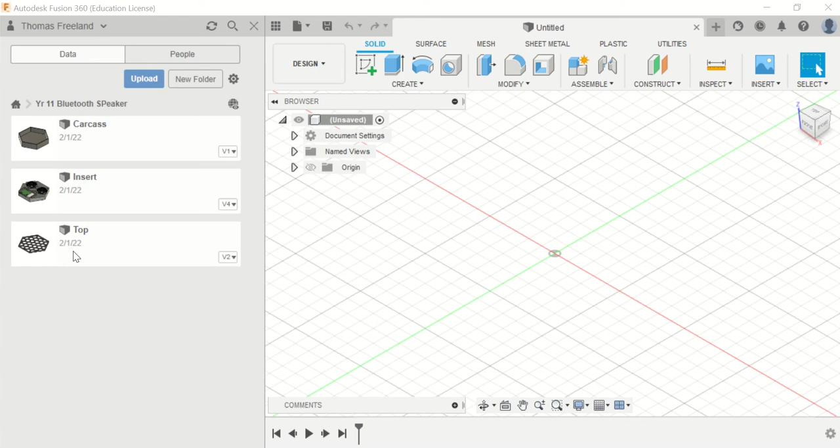Hi, so in this video we're going to place in the holes for the jack and the switch in the carcass. So I'm just going to open that. Then we're also going to put the job together and do a little bit of rendering.

First things first, we need to figure out how high up these two aspects are. I'm going to open the insert in a separate tab. This is the switch and this is going to be where the micro USB comes in. So what we're going to do is just measure those.

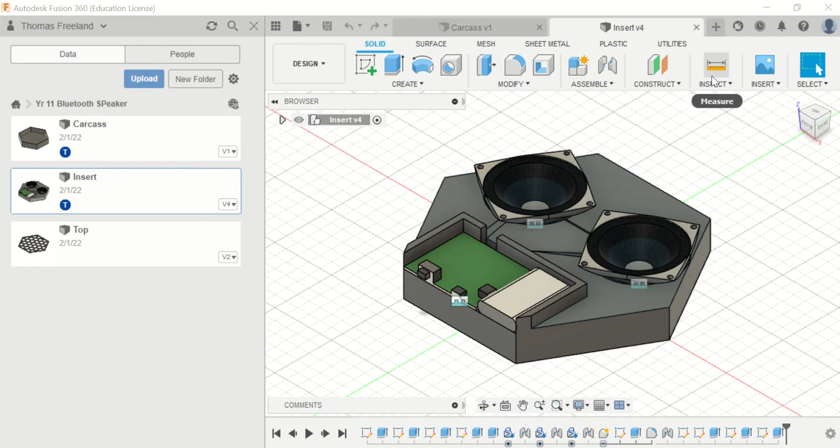I'm going to go to front view, angle it off a little bit, and use inspect from there to there. So that's 28.28, okay, from the ground to there.

Go to my carcass and figure out the depth again. So that's 35, let's write that down - 35, and the other one is 28.3. For the switch, let's see how the depth is - okay, 40. So that means the depth of my job is 5 mils.

So I'm going to add 5 mils onto that 28.3, and that'll give me where the switch will go. The next thing we need to do is figure out how far that switch is in from the edge.

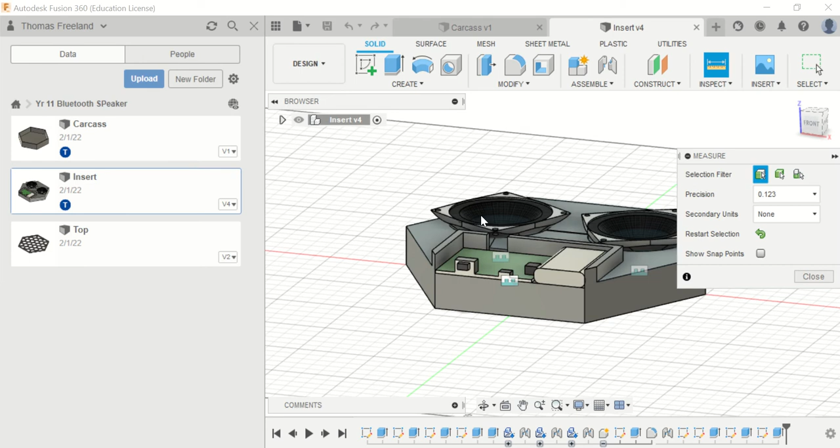So this will be one of the edges, from there to there - 16.753 on the inside. So what I'm going to do, because it's internal, I'm going to go like this.

Rotate it up. Got my line, I'm going to do a construction line. Got the corner. Actually, I'll get rid of that 5 mils as I'm doing it on the inside, so I don't need that anymore. So it actually is going to be up

28.3, and go to the side from here, which will be - just going to double check it - 16.7, 7.7, good. And then I just need to figure out how far that is across and down.

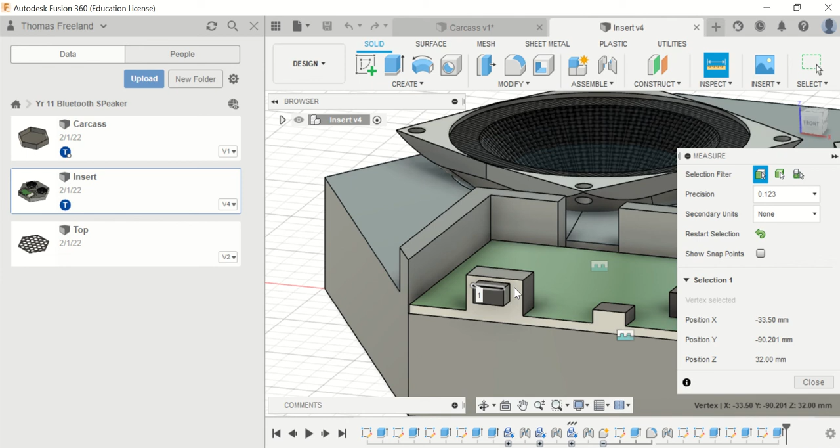So that's 7 mils, 4 mils, so now I'm going to create a square here, 7 by 4. We can turn those construction lines off. 7 mils, that's 4. We might add a mil on just to give a bit of wiggle room.

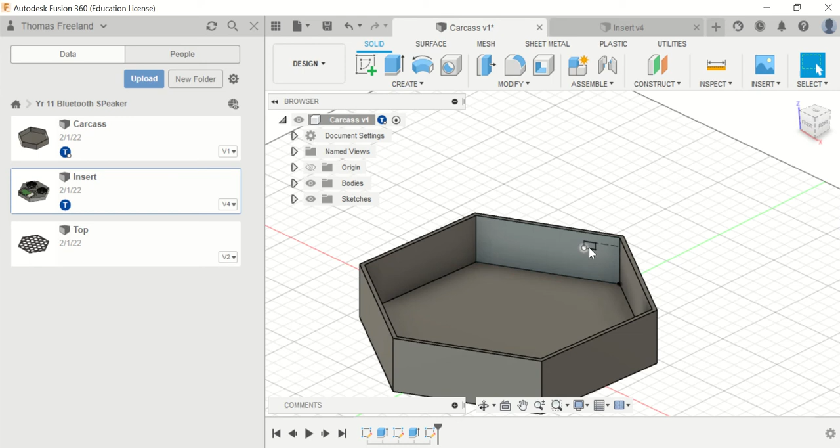8. Right. Close that sketch and then extrude that out with E. Just going to draw that tab like so.

What I'll do next is the micro USB - how far is that from there to there? So 25, write that down, so 25 on the internal.

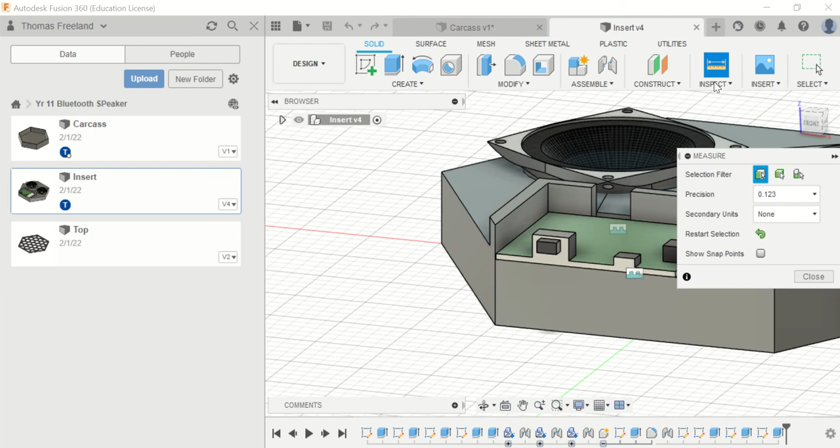And now let's find out how far this one is from the side. Okay, so that's 42.2. And then let's figure out the dimensions of this one too.

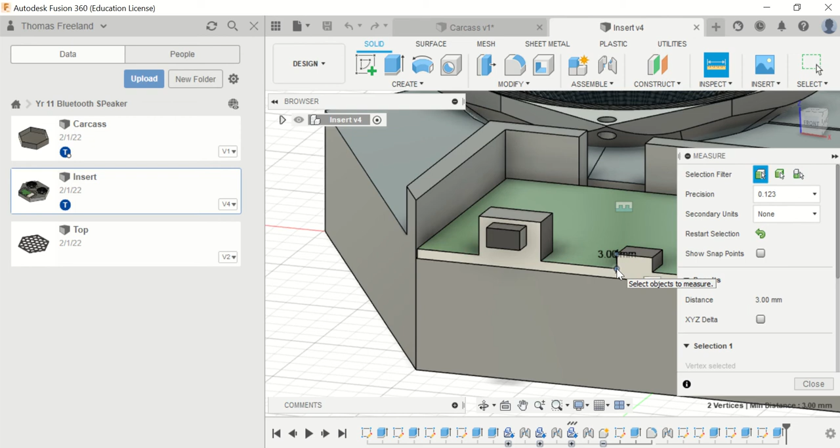7.5 by 3. So let's add another mil onto those, or a couple mils. So let's make it 8.5 by 4. That allows for a bit of wiggle room. So let's bring it in from the side here.

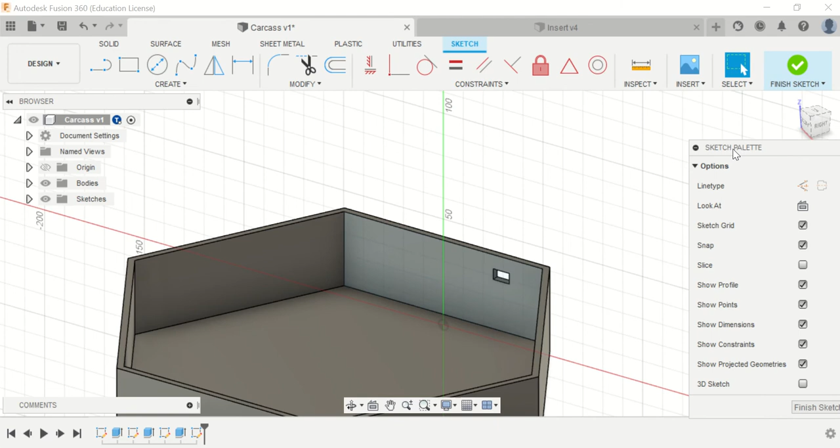Put this palette over here, give ourselves a little bit more room. Turn our construction line on. Got this corner in here. We're coming in 42.2.

Going to come up 25 mils. 25. We've got a square, which is going to be 8.5 wide as we've added on a little bit more, and then it's going to be 5, like so.

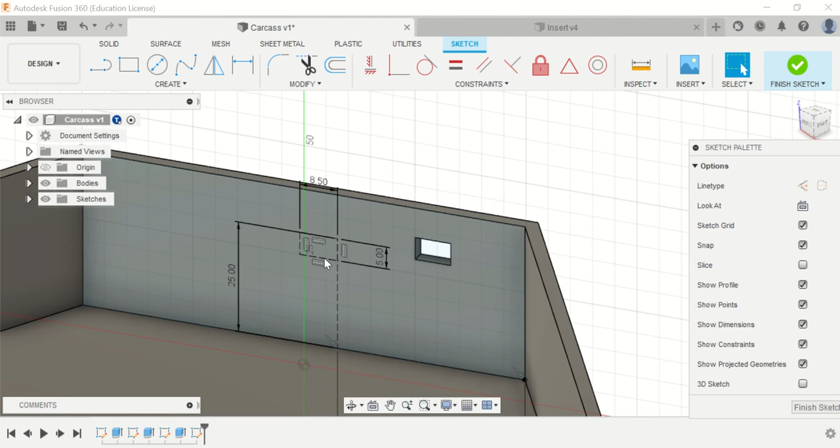Let's click on each of the lines, as we didn't turn the construction lines off, but that's okay. Construction lines - turn them off. Extrude, take it out. There we go. And we'll save it.

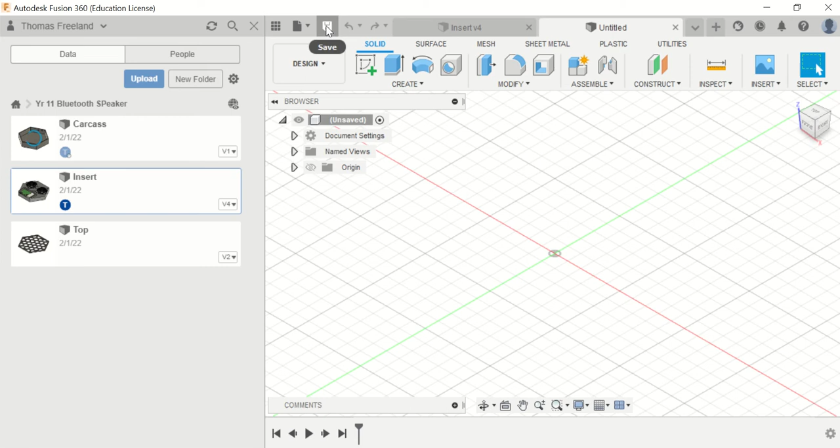And what we're going to do now, we'll open up this, and I'm just going to open up a new design because I want to create a new design for our whole job to sit in. So we'll call that completed speaker.

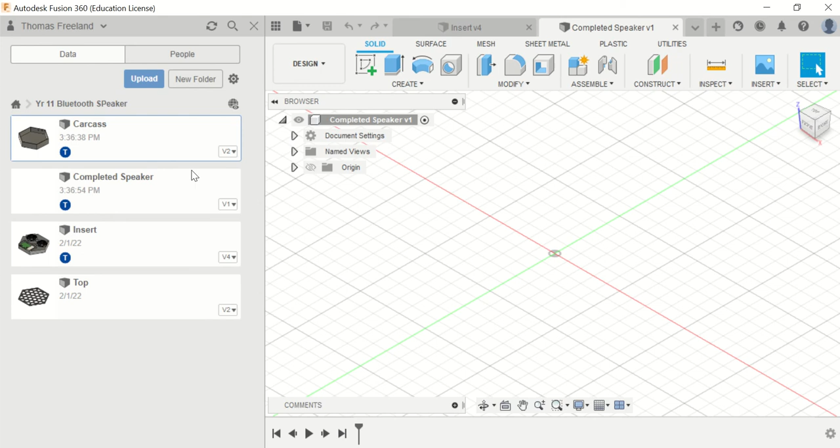Okay, so what I'll do in that completed speaker, I will insert this into my current design. I'll rotate this around so I have the components right here. We'll save that, we will insert this in. I might just delete that for a sec.

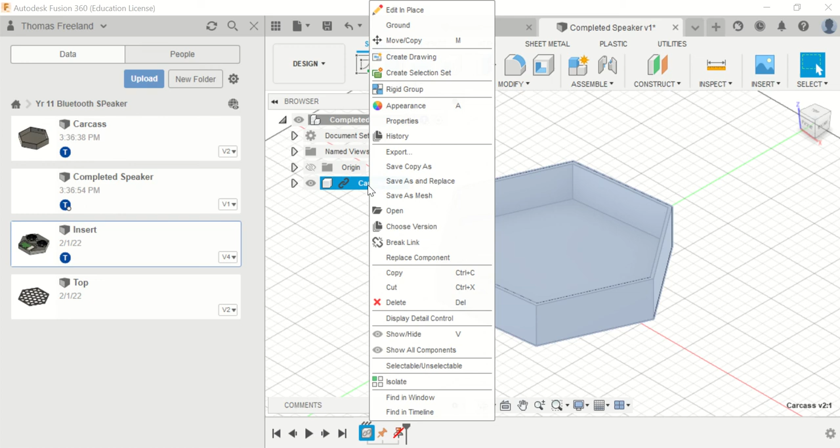So the way I can delete that is just by going like so, because I want to ground my object. So what I do, I right click on this and go - just do it again - ground. So it should have this little thumbtack there, so that means it can't move. I'm going to insert this into my current design, the insert,

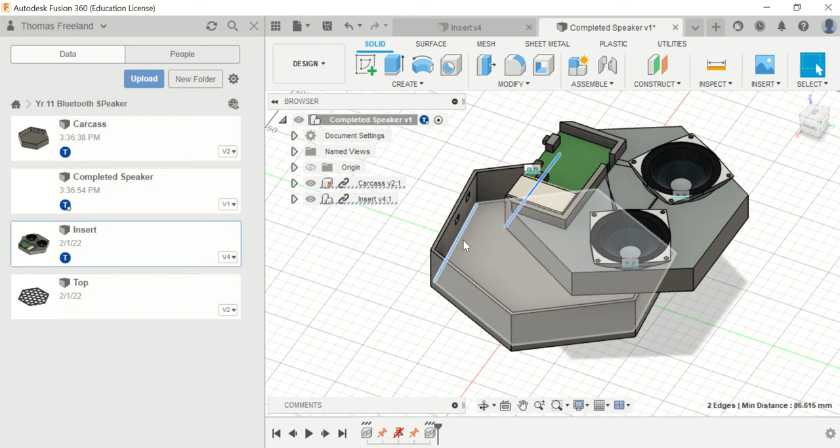and I just want to take it back a bit. I'll enter, select this line, going to rotate, hold down shift so I can have both blue and blue because they're going to line up, and I click the joint tool and enter. So everything should line up in theory.

Okay, now what I want to do is go top. I will put my - before I put the top on, I just want to do a layer under the top to simulate where the fabric will go.

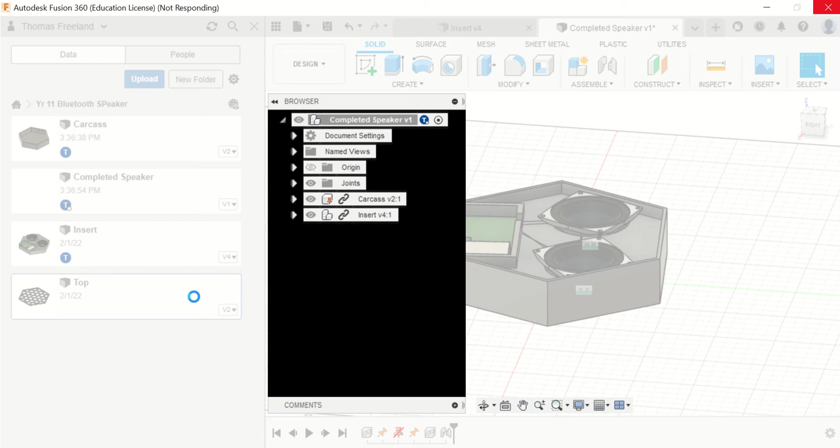Once it loads, I just want to simulate that. So all I'm going to do is click on this, as I want to include a new sketch. Go create polygon, edge to edge polygon, and all I'm going to do is go from here to here, 6 sides, and there we go. Finish my sketch.

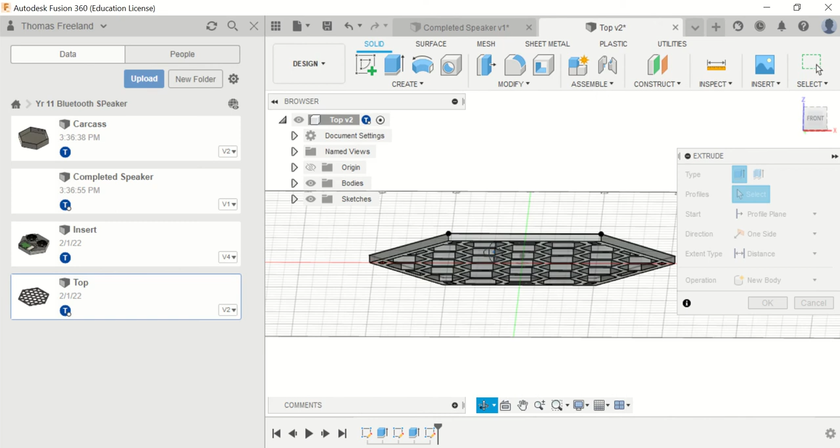That'll allow for us to do a bit of mesh underneath to just save, so we don't worry about that for the real thing. What I'll do is go back to my completed speaker.

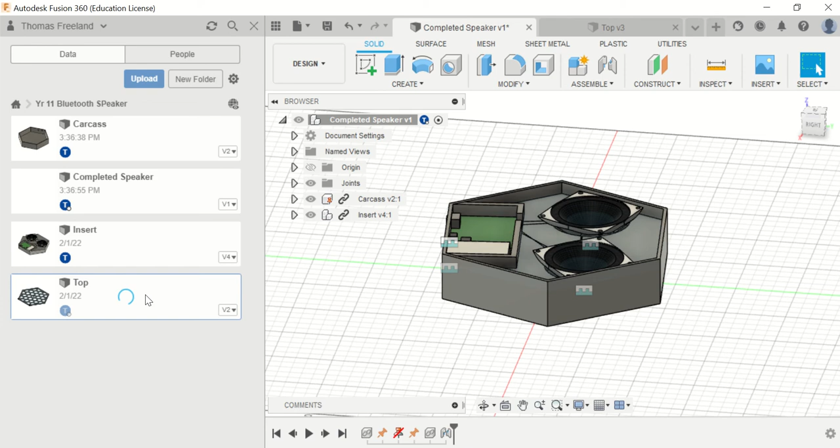As my top saves, I'm just going to insert that into my current design. Just going to move this out of the way, enter, click on my edge, like so, and we've got to enter. So we've got our top really nicely in there. We've got this like so.

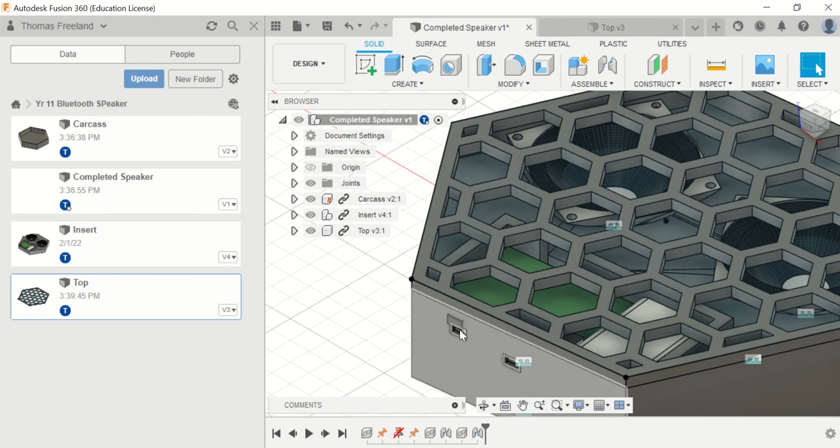So obviously it looks like we might have to rearrange this to make it a little bit higher, as it doesn't look like it's sitting as cleanly as it should. So we'll have to go back and re-measure that, but that is fine.

What we can do, which is completely fine, is measure from there to there, so it's 4 down. So I can actually edit this, and this is actually probably a good thing, as I'm able to show you this in real time. Then I'm just going to double check this again. So 7 wide.

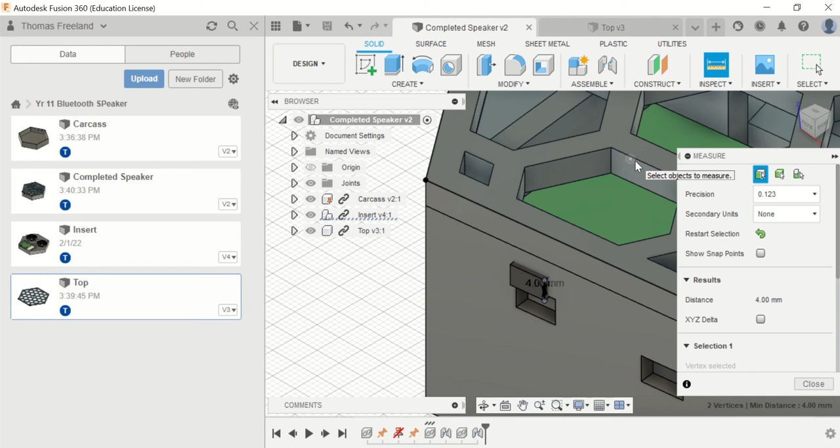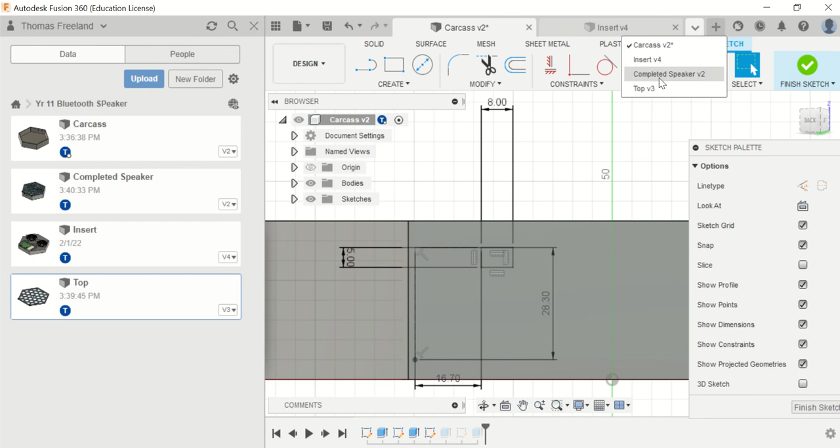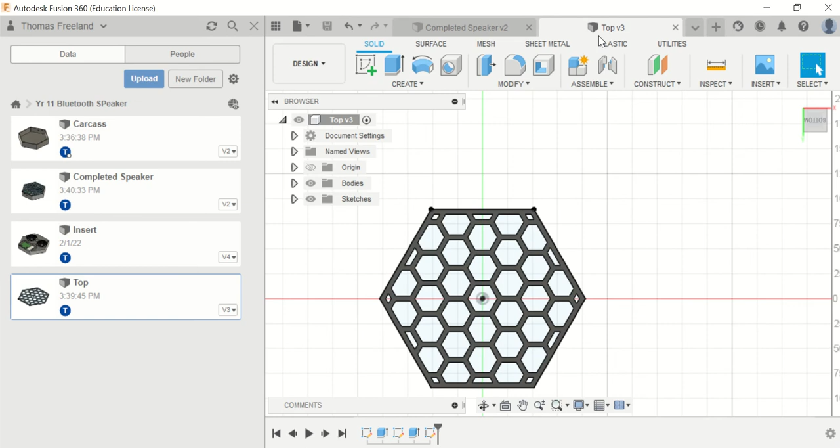Completed speaker. Let's have a look how far it's off, because I'm actually able just to reconfigure it a little bit. It needs to be higher. So it actually needs to be, okay, that's a mil. Let's take away a mil, so 4 mils, take away 1 is 3. And we need to bring this up. Let's bring it up another 5, another 4, so 32, 33.2.

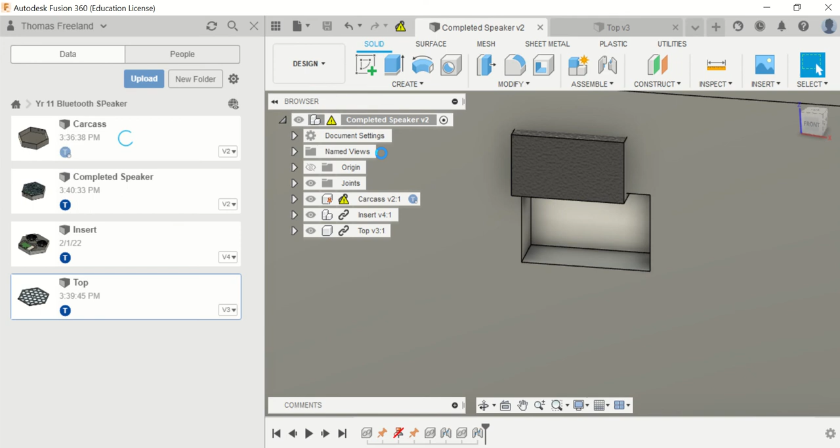Save. I've saved that, and what I'm going to do is go back to my completed and see how this yellow is there, because I've updated it in another sketch, and that moves into place.

Now what I want to do is move this. It looks like I might have gone up 1 mil too much, and that's fine. I need to move this across by a mil or 2 that way.

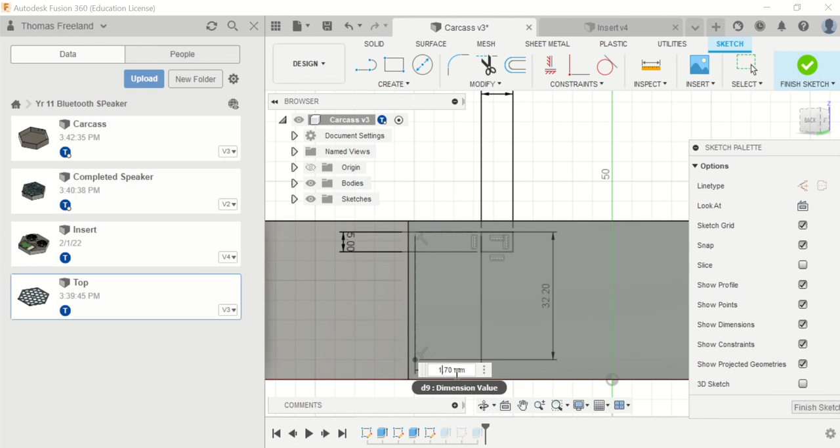Go back to my carcass, go back to this one, right click, edit. Let's go 32, and across, let's go 15. We go finish, save.

Back to my completed, re-click on this, and it's right, perfect in the middle. So we'll save that one right there.

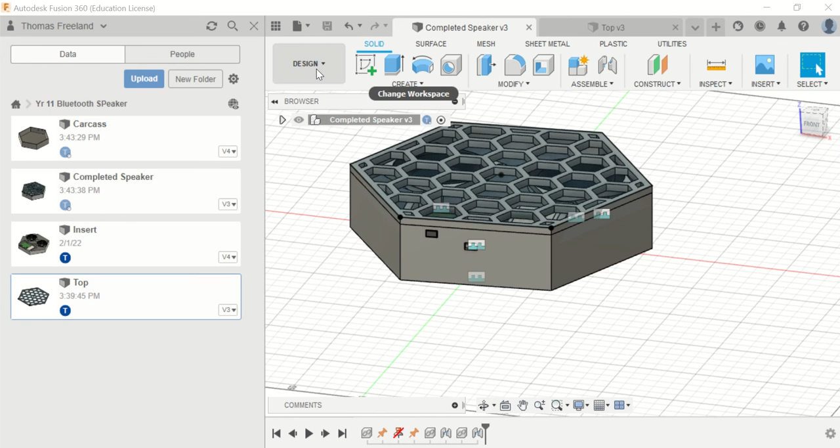What we're going to do now is we will work on this top to see how we're sitting, and we will render. So I'm going to go to render, and we will start to render this.

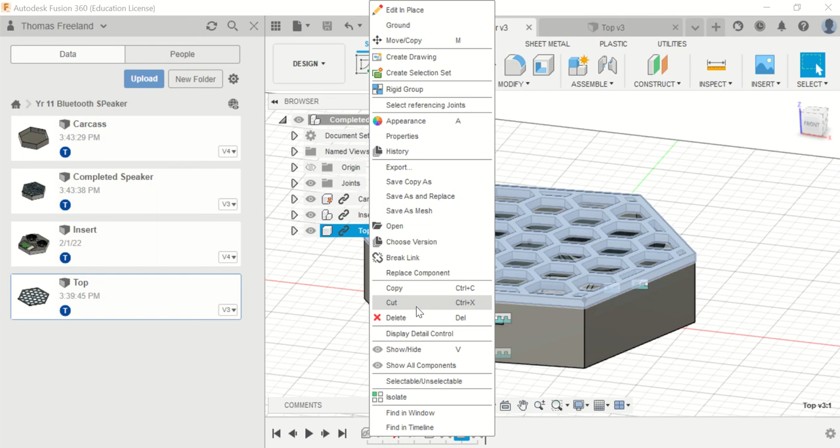Having a look at this top, it looks like how I put that edge on, we might have flipped it the wrong way. So I might just go back to my design. I'm going to go to the top, and I'm going to edit this, edit the appearance of my top sitting on there. So I can click on that and go edit in place.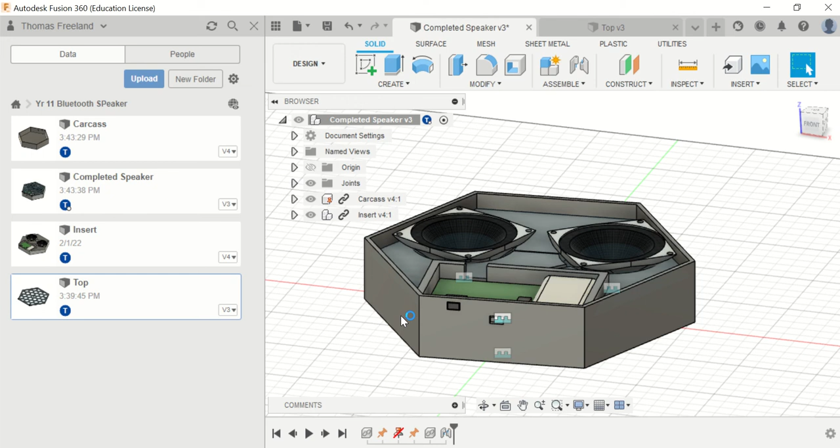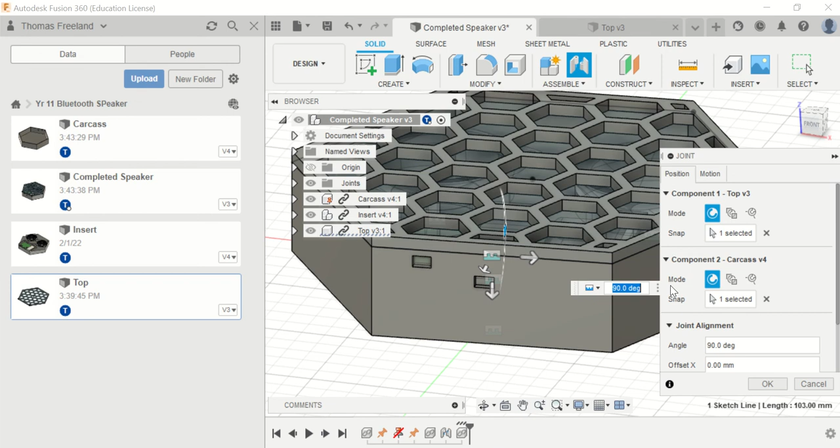I'm actually going to rotate it. Got my top right there. It's actually inbuilt in my body at the moment. Seems to be sitting in there, which is okay, like so, and it's actually below the surface now, which is really good. I'll save that, because that's really going to help with how I put my mesh on, how it's all going to sit.

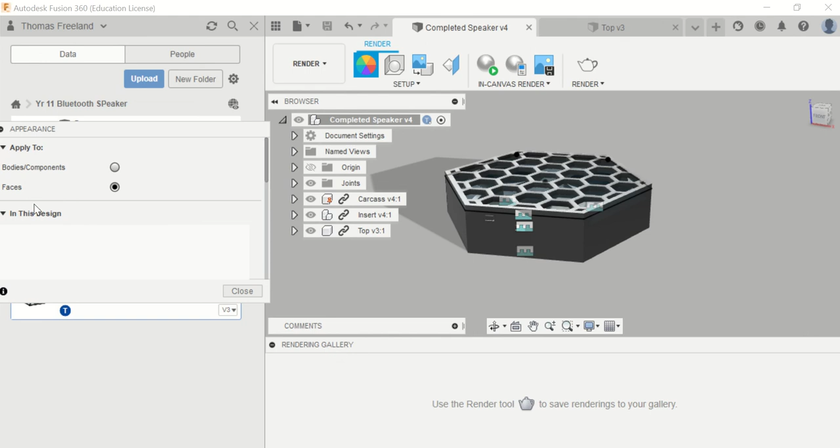Now, to see all my components properly, when I'm rendering, I will take away layer by layer so we're actually able to see different things. Now it's really good because the component's already done. I'll click face, close this, so I'm actually able to see things. And I've got all of these different elements here. Now you might have to download some, but some are already pre-downloaded.

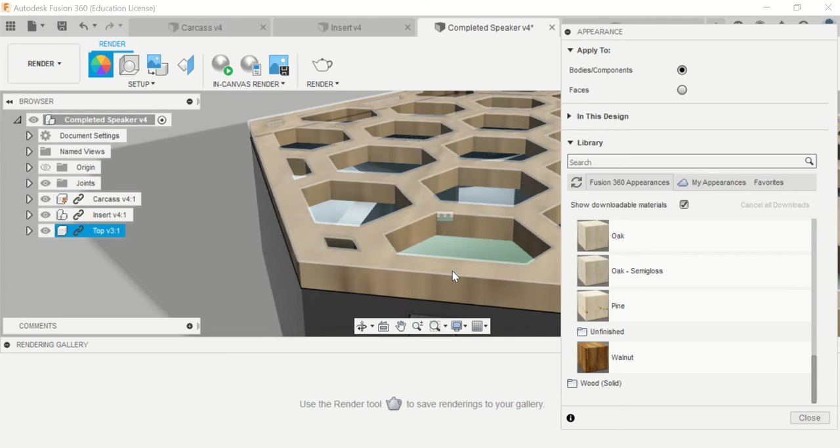So I'm going to choose some. I've got this right here. Okay, my oak, bodies/components. I've got my oak for the outside, and then let's just have a look for paint. I could go glossy, metal flake. I might go for a yellow.

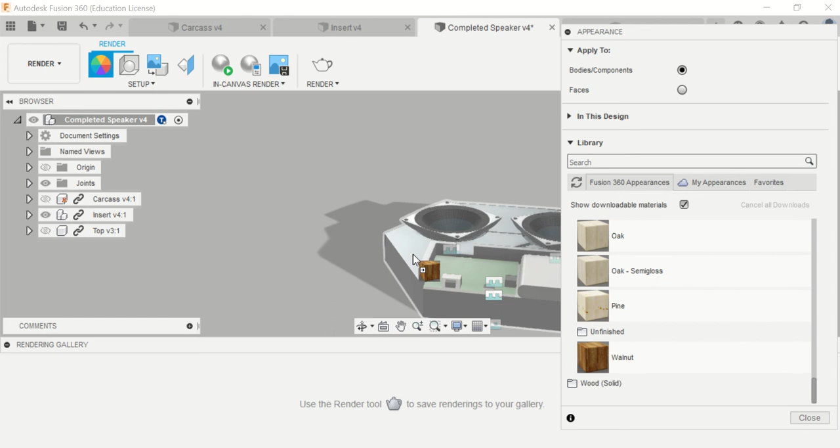For the outside of that, and then underneath I'm also going to have my insert, so I can get rid of my top, get rid of my carcass, and I've got my nice insert under there, which I'll have a look at, and maybe I'll use a nice walnut or something for the inside.

Oh, it looks a bit dark, so I'll have a look, see if I can go maybe a glossy pine or, as it loads, there we go, looks quite nice. Looks like it's turned out really well.

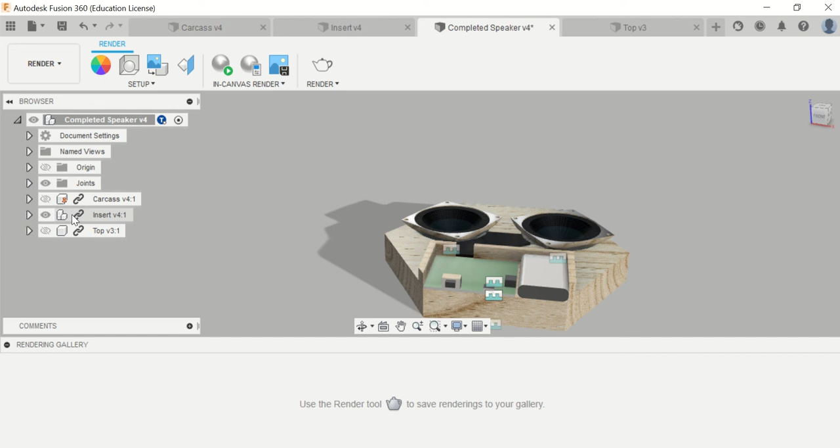So I'll turn my carcass back on, turn my top back on, and what I will also do is try and get that top and get under the top, which I have there. Go my colour again.

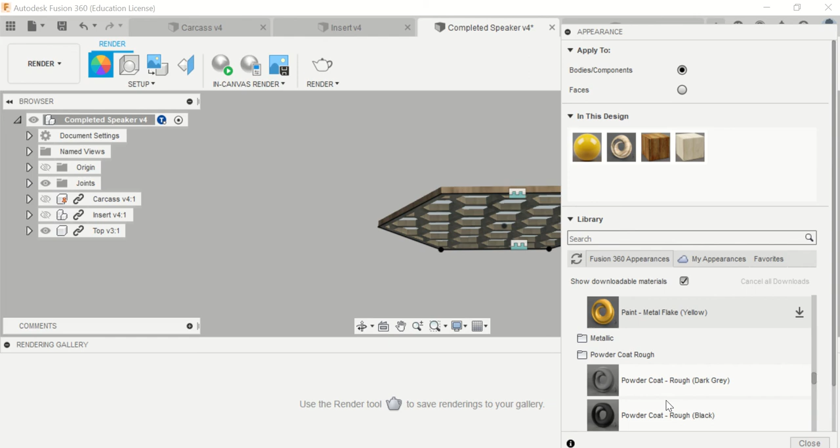I want to go the fabric, see if I can find some black. If we can't, I might just go for maybe a matte black or a powder coated rough black, which could signify the underneath.

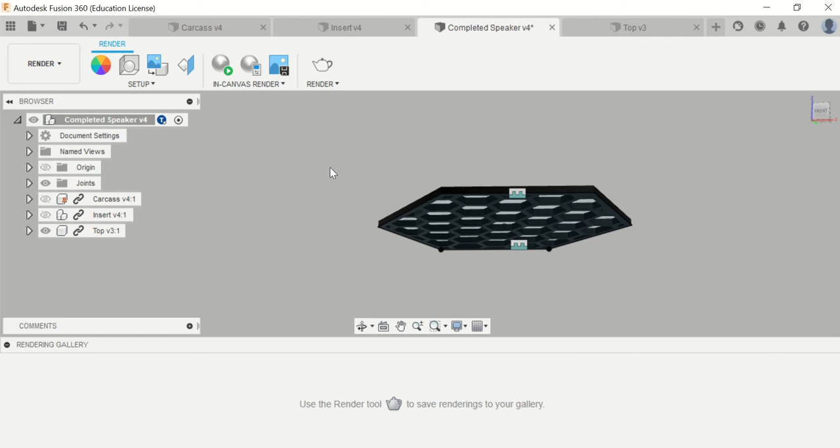Or I might just leave it nice and coloured as well. Turn these all back on like so, and I've got this coming through. I can just see these.

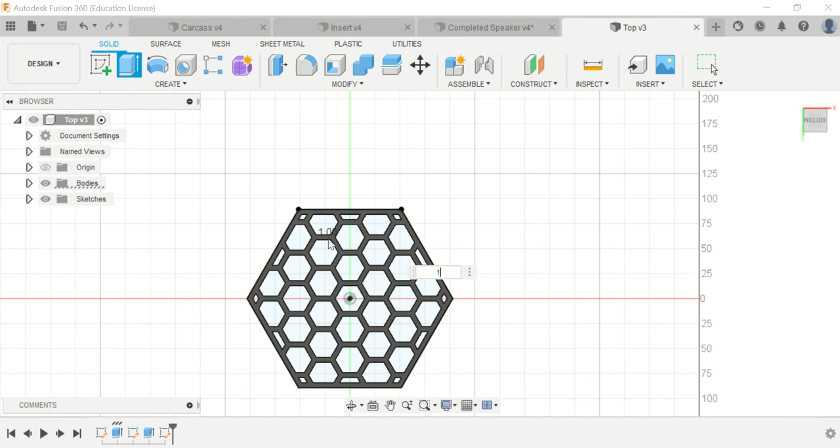What might be a good idea, I have my top, like so. And I've got that top like that, which comes in like so. Nice and completed.